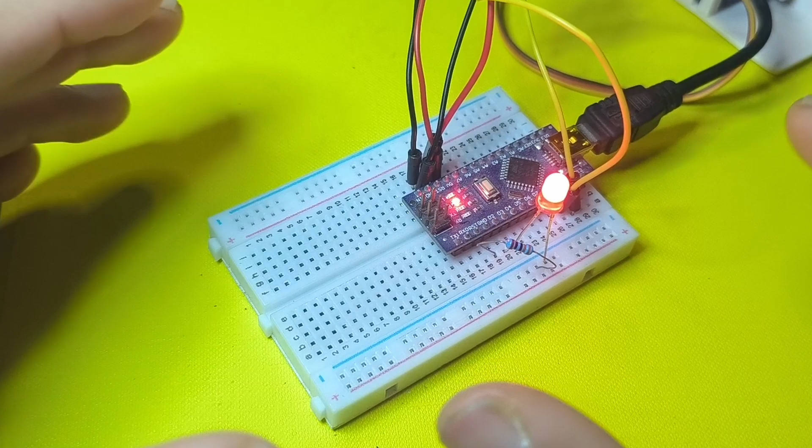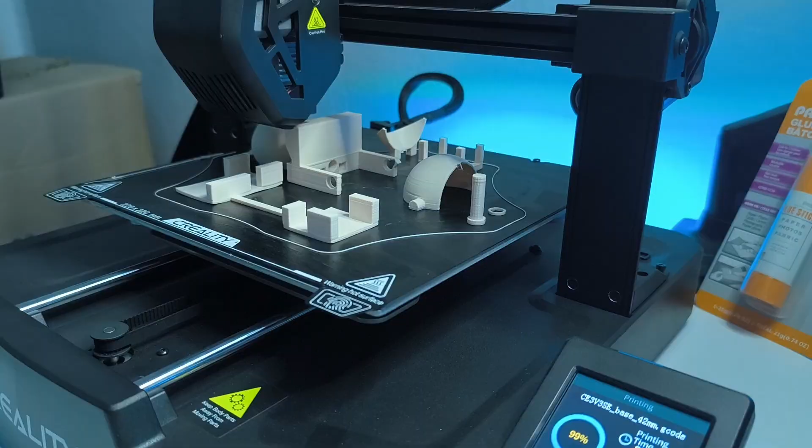Today we are going to create a blink sketch, and not this kind of blinking. We will have this blinking eye. We are going to 3D print this model using a free website which is called Thingiverse and connect it to a microcontroller like the Arduino. Then we can create this kind of behavior, which is a blinking.

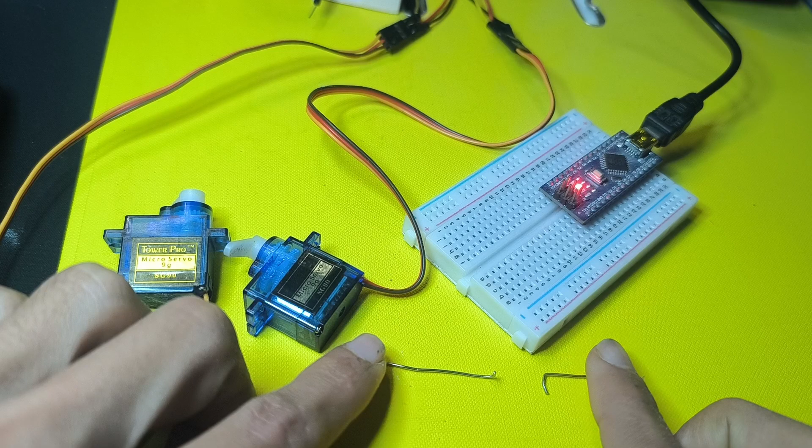So to create this project, you're going to need a microcontroller like the Arduino Nano or the ESP32, it doesn't matter. You're going to need two servo motors to control the eye. We are going to connect these two wires to the handle of the 3D printed parts. So first of all, we have to 3D print all of the parts that we're going to need.

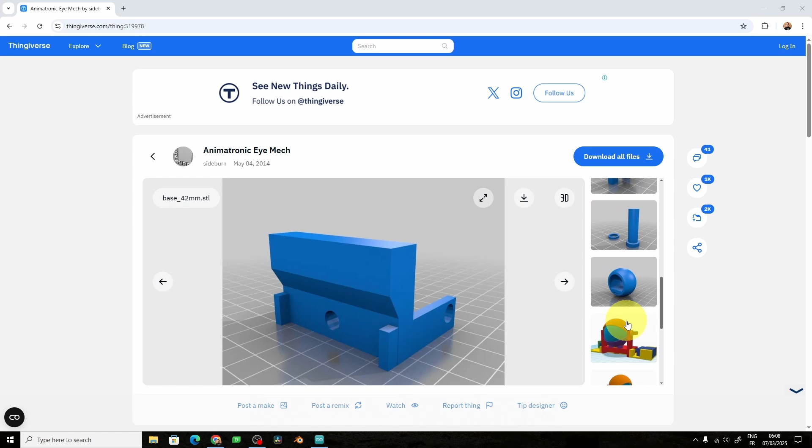To do that, you can go to this website, which is called Thingiverse. You can download this animatronic eye mech for free. You simply have to drag all of these parts and print it. Of course, we have to slice it using a slicer, like the Ultimaker Cura, and you could see all of the pictures so that you can know how to hook up all of these parts.

So here we have the two servo motors. We're going to use one of these servos to control the ball of this eye so that we can move it right and left. And we can use this handle to move this part so that we can make a blinking sketch. Or we can use this joystick to control the eye and move it. We're going to check that out in the next video.

First, I'm going to download all of the files. And once it's done, we have to extract it because we have a zip file, using right click and extract it to the animatronic eye folder. And here it is. And we're going to go under files. Here we have several parts.

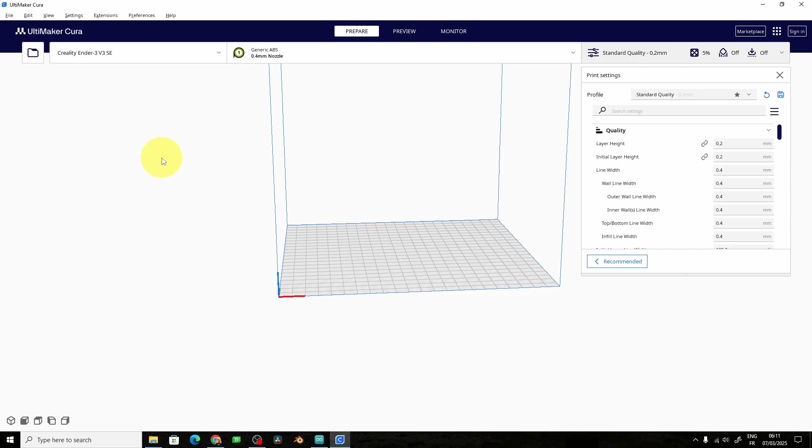We can put all of them inside the Ultimaker Cura, which is the software that is used to convert these 3D models to a G-code that the printer can understand. The default settings are going to be okay, but I think you have to rotate a few parts so that you don't need to add a support for that. Let's go ahead and drag the base and put it right here. Next we have the slot.

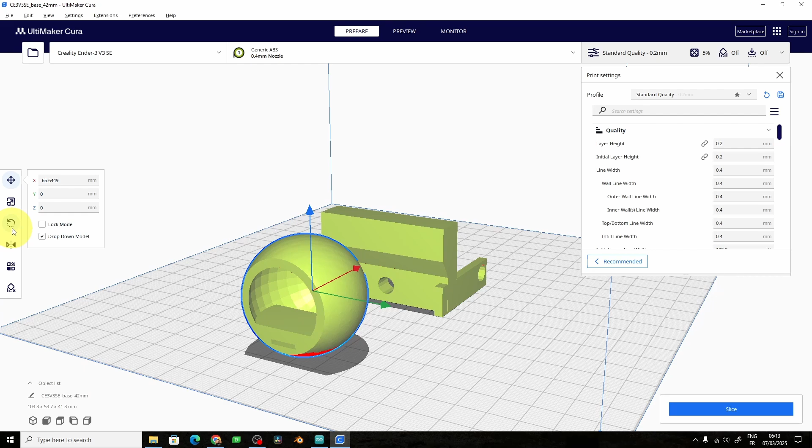So for this 3D part, you see that we have this red area. That means we need a support. To avoid that, we can rotate this 3D model, or we can go to this option under rotate, select face to align with the build plate. We're going to use this one. So the orientation does matter for 3D printing.

Next, we can select the other part. The same thing, I'm going to rotate it by 90 degrees around the y-axis, or we can select the face to touch the build plate, which is this one. Of course, you could drag all of these at once by selecting the first one and shift select the last one, but make sure to separate all of the parts using the move tool.

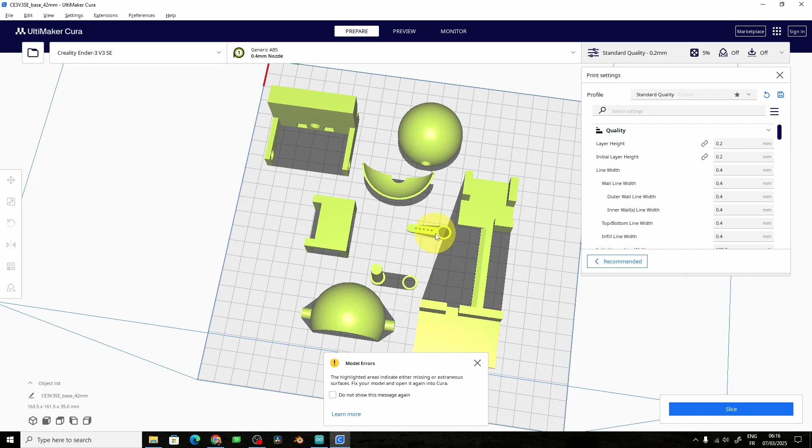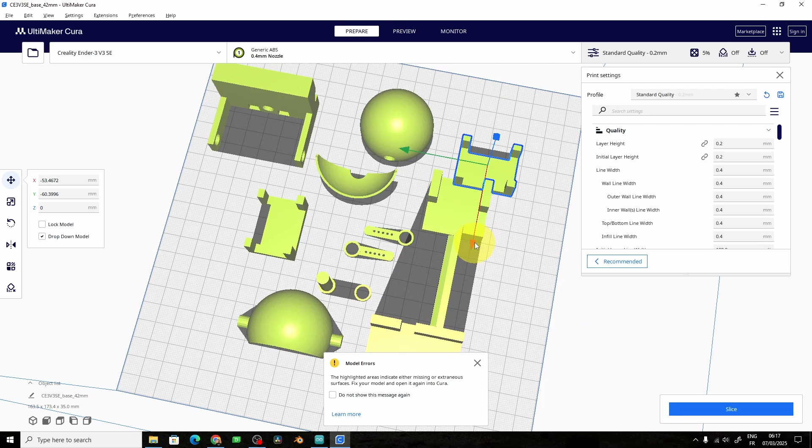For the control arm, we need two of these so that we can control the two servo motors. So I'm going to duplicate it by right clicking and multiply selected. We only need another one. The same thing for the cover. We need two of these, but first I'm gonna flip it. I'm gonna select the top face to attach to the build plate, and duplicate it using multiply and move this slightly. I think that's pretty much it.

Now we can start slicing using this button. Finally, I'm gonna save this to the SD card so that we can print all of the different parts. So I think it took about 4 hours to finish all of the parts, and I have chosen this color, which is a beige color. And there you go, I have finished connecting all of the parts.

We're going to control this eye using the arms. So we have this arm to control the horizontal movement so that we can move the eye left and right, and the second arm on top to control the top part of the eye so that we can make a blinking sketch or any kind of movement.

But first of all, we have to connect the servo motors. The same thing for the horizontal movement. We are going to use this servo motor, and let's put the cover. The same thing for the second servo, and there you go. Now I'm gonna connect the last wire so that we can control the bottom arm. So I think I'm gonna put it this way, and there you go.

Now we are going to control these servo motors with our Arduino board by connecting our servo motors. So each servo has 3 wires. The brown one is the ground that goes to the GND of the board. The red wire is the VCC, which we're gonna hook up to the 5-volt pin of the Arduino. And we can control the servo with one of the digital pins. So I'm gonna use the pins number 9 and 10.

To do that, let's connect the data pin or the signal pin, which is the orange wire. We're going to control the vertical servo with the pin D9. Here we have the VCC. And finally the ground. The same thing for the second servo, but I will use the digital pin number 10 and connect the VCC and the ground. And I think that's all what we need for our circuit. Let's move on to the Arduino IDE.

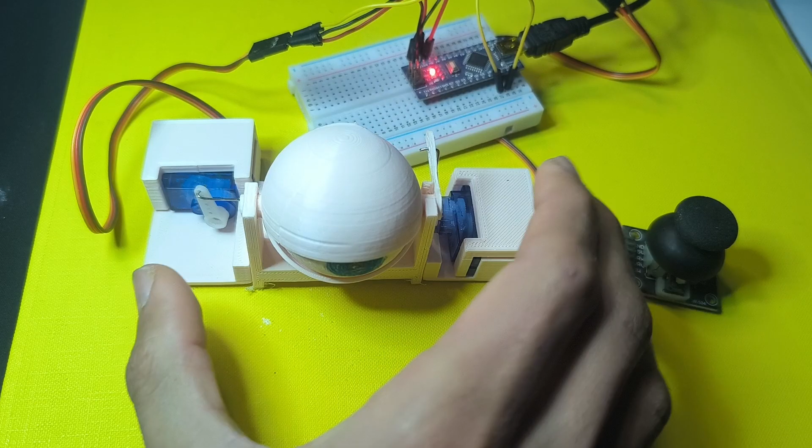Let's make a simple test. I'm going to change the angles to 0 so that we can see the position of the eye. Let's try that under the loop function, which is called over and over again. To change the angle, we can use horizontalServo.write. That takes in an angle. I'm going to use 0 for now. The same thing for the vertical servo. Then we can hit upload after selecting the board, which is an Arduino Nano, and the COM is COM6 for me. And there you go.

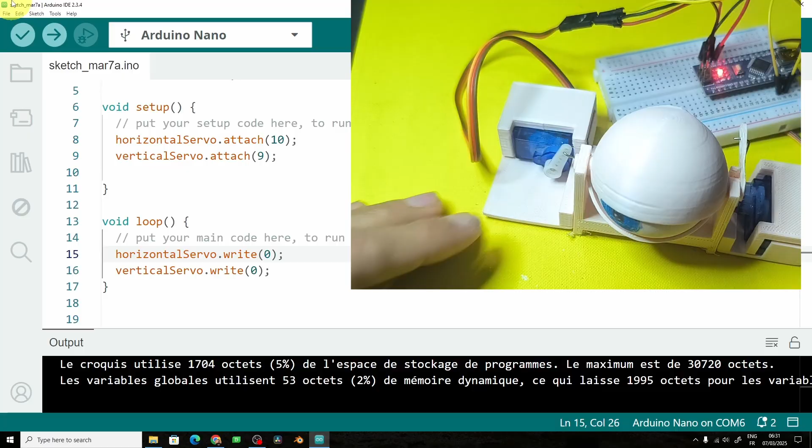So the angle 0 will move the eye to the left side. Let's try to change it to 150 degrees or 170 degrees and hit upload again. And there you go. I think that's too much for the eye. That's why the arm is over here. So I'm going to bring it back. Then let's try with 120 and hit upload again. Yep, that's fine. Now let's test the vertical servo movement by changing the value to 120 as well. I think we can increase it a bit, like 150.

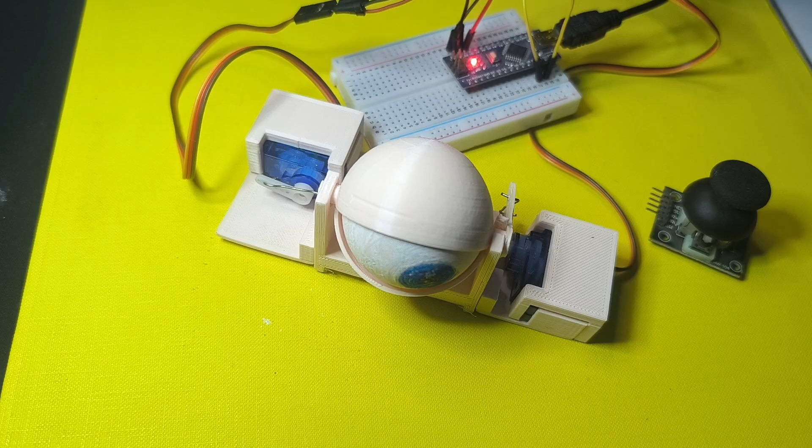So now that we know how this servo motor is controlling the eye, let's try to make a blinking sketch. We're going to open and close the eye each 1 second. And to do that, let's go under the loop. For the horizontal servo, I'm going to use 90 degrees, which is going to move the eye to the center. And to make the blinking behavior, we're going to control the vertical servo. For example, we can set it to 0. Then we can wait using delay, like 1 sec or maybe 500 milliseconds.

Next, I'm going to copy the same values. And we want to change the vertical servo angle to 150 or maybe 140. Then we can wait for half a second again using delay. And that's actually our blinking sketch. We are just controlling the servo motor angle and not the LED. And let's hit upload. And there you go, we have a blinking eye.